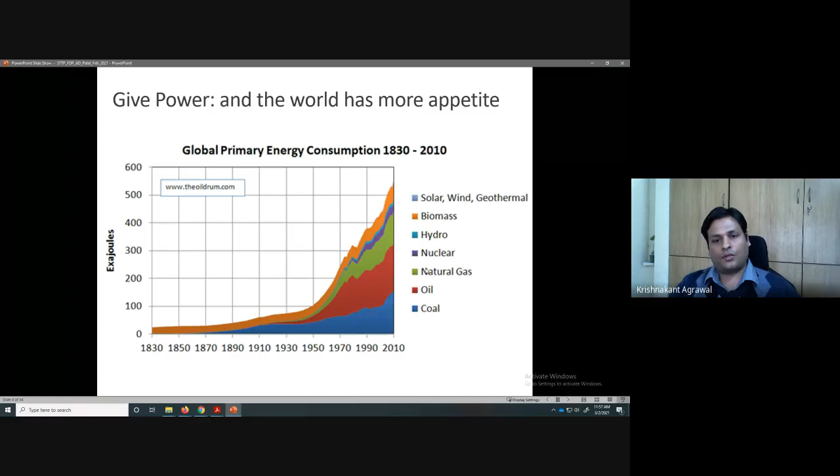But you can't expect to change this scenario overnight. So it will take some decades, or maybe multiple decades, for this scenario to be reversed, that you are having a larger share of renewables and less share of fossil fuel. So this is the world we are living in today, and this is what is happening.

For everything we have discovered nice comfort, and for reducing our effort we are having appliances, and we have some useful appliances, some useless appliances also. But the number of appliances, if you count in your home, will always be growing, it will never be reducing. So you keep buying more things. Dishwasher fortunately is not there too much in India, but it's widespread in Western countries. Air conditioner is a necessity in cities like all the North Indian cities, and so we cannot tell people that you cannot buy these appliances. People will, if they can afford, they will buy.

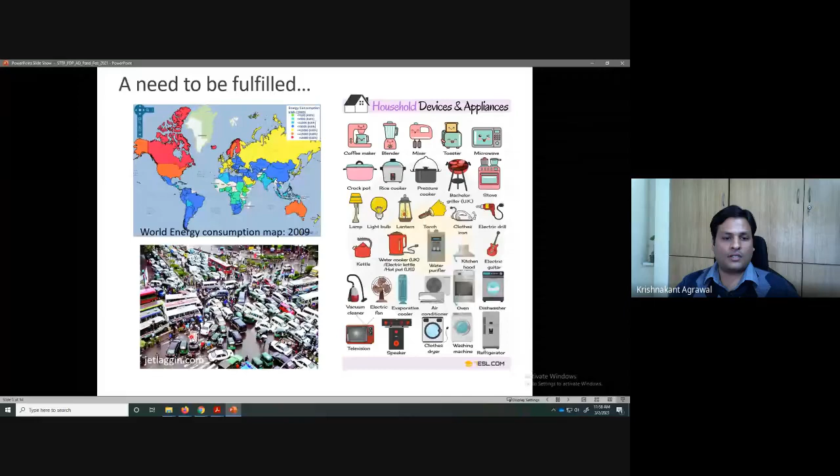And for powering these appliances, you need energy, and you can see the world's energy consumption map. India is reasonably okay. People in the United States are consuming a lot, and China is also consuming a lot. So the need is there, and even your automotives are driven by fossil fuel. Even if you replace them by electric vehicles, to charge the electric vehicles, you need to generate electricity. So to produce electricity, we are having many ways of fulfilling that demand.

We do oil and gas extraction, and petroleum refining. The gas can be burned in a gas turbine, or the oil can be burnt in a gas turbine. This is a typical modern gas turbine combined cycle power plant, which you should be able to see in the outskirts of your cities. Most of the cities in Western countries are powered by gas turbines. In India also, almost 10 to 15% of total power is generated by gas turbines. In fact, in Delhi, the main electricity supply is coming from combined cycle gas turbines.

So here, this small thing over here, this is the gas turbine where the fuel will be burned and power will be produced. You will have an electric generator over here, and then the exhaust gases will go and do heat exchange, and this heat will be used to boil water, and with that water you can make another steam turbine run. So this is why it's called combined cycle. You can get more efficiency.

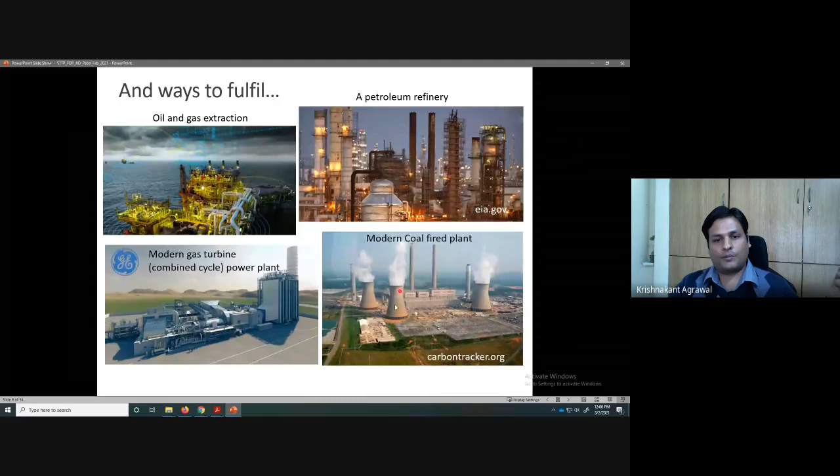Or you can have a traditional coal-fired power plant or nuclear power plant, where you are burning coal, or nuclear power is heating the water, and steam power is used to produce power. So there you will see big chimneys because you want to condense the water. So this is the world we are living with.

So fire originally was used for heating, cooking, protection from wild animals, and it helped to form communities, development of the brain, development of language, Bronze Age, Iron Age, metal extraction; everything was possible because of this. Agriculture, curing disease, and all these things were good. So fire was a nice discovery. I don't know who has the credit for that, who has the patent application for that. But at that time they didn't think about this. So nice discovery of fire, but what about global warming?

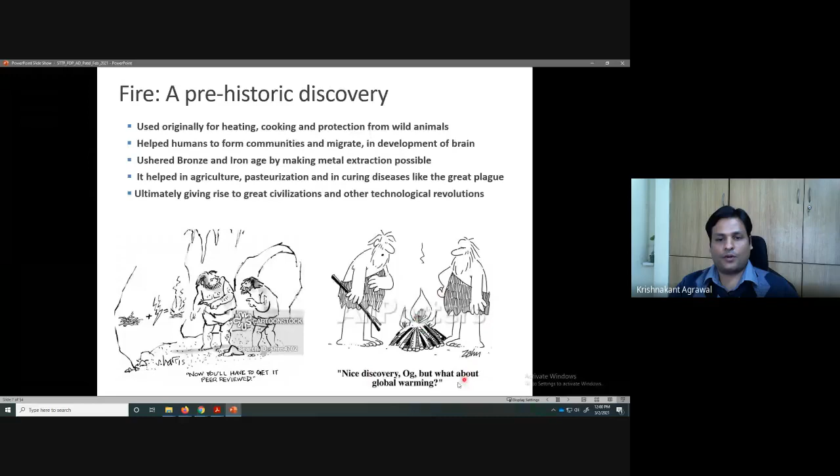So one thing is that we are burning fuel, and why is it bad? It is bad because at present, you see these temperatures are continuously rising, Earth's temperatures are rising, and we are every day seeing the effects of global warming in terms of unpredictability of the weather. It's not like the Earth will get warm uniformly and then the sea levels will rise.

It's not like that. There's a very delicate balance of the environment, of the climate, and global warming disturbs that balance, and then suddenly you start seeing floods in many regions, you start seeing fires in many regions. So last year there was a fire in Australia, and then in the Amazon jungles, and then in California also.

So these fires are getting more and more predominant, and they further increase the global warming. And you see the sea levels are rising. Venice, the city which is famous for all its canals, is situated on the bank of an ocean, and the entire city is submerged in the ocean. So there are no roads in that city. Basically, the waterways are used for all the public transport. So that entire Venice city was flooded by rising sea level.

So all these examples, and then you see so much of floods everywhere. All these weird effects of climate change are happening because of global warming. I showed you first a graph of energy consumption, and then I told you that in the graph of energy consumption, the major contribution is from combustion, burning of fossil fuel, and this is the CO2 emissions. So these two graphs correlate very well. You're burning more fuel, you're getting more CO2 emissions, you're getting more global warming and all these harmful effects.

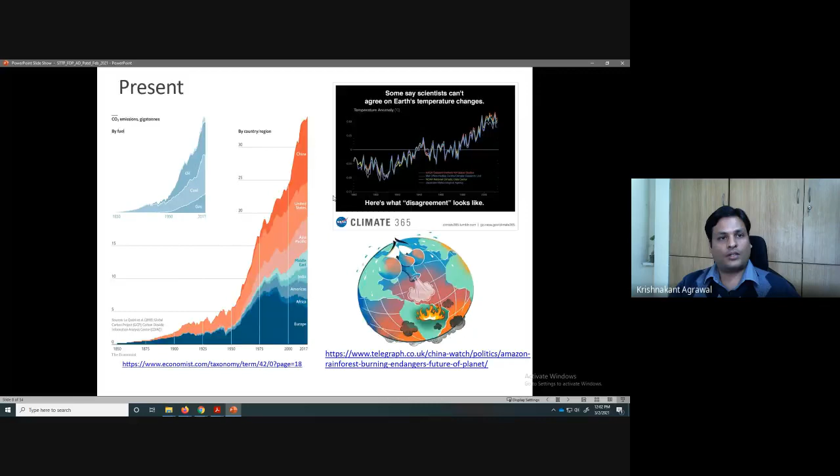So there is a big push everywhere in the world to reduce the fossil fuel dependence. But with a graph looking like this, growing exponentially, an economy always trying to increase, we are trying to get a better economy. It's not like overnight it will be coming down. So what is the future? So we invented fire, but accidentally we burnt our hands also with fire.

And now we are stuck in a world where we cannot deny the comforts of modern living to anyone. We want to have cars, we want to have air travel, we want to have a lot of transport options, we want to have appliances in our home. And we cannot deny this to people, and we have to burn fuel to satisfy that demand. So we have burnt our own hands, but it is going to stay there. So as an engineer, what can we do?

So we are going to have a focus on sustainability. We try to reduce CO2. There are of course some methods like capturing carbon dioxide, carbon sequestration and all, but the fundamental, most basic way to reduce CO2 emission is to make engines more efficient. Typically the IC engines we have on road in automobiles are 15-20% efficient, and gas turbines give around 30% thermal efficiency. Combined cycle gas turbine, where you use the exhaust of a gas turbine to run a steam turbine, can give you around 60% efficiency. So that is the maximum that we have.

So why is efficiency important? Because you are burning fuel, and from that fuel, how much power you are getting. If you need 1 unit of power, how much fuel are you burning? Typically, in the automotive industry, we need to burn nearly 250 grams of fuel to get 1 unit of electricity. 1 unit of electricity is what runs your AC for 1 hour, or your geyser for 1 hour. For that, 250 grams of fuel you have to burn. That is a typical guideline.

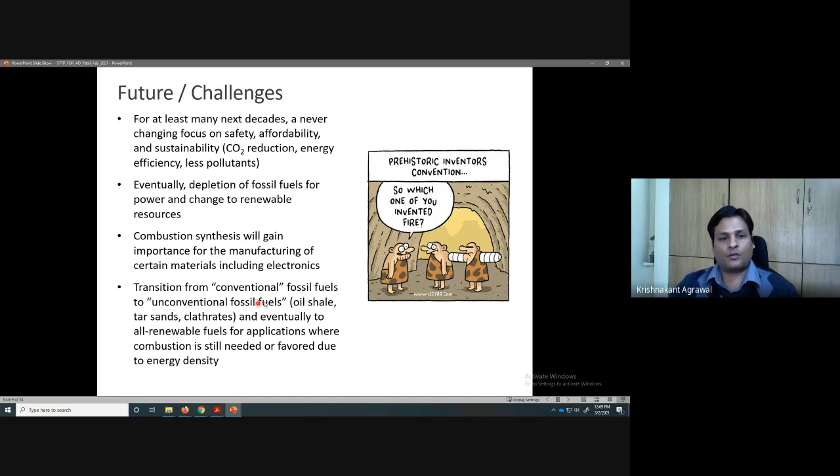So the challenge for engineers is that I have made an engine running on natural gas or petrol, and then you are telling me to burn a new fuel. So then research has to be done. It's not so easy to burn the biofuels and all these unconventional fossil fuels. If the nature of the fuel is different, then the challenges in the combustion will be different.

Inside the flame, there is no oxygen. So the combustion cannot go to CO2 and H2O. After combustion, you are not getting CO2 and H2O. In fact, you are just having hydrocarbons. Those hydrocarbons do very nasty reactions, and they make some particulate matter, polyaromatic hydrocarbon, and soot.

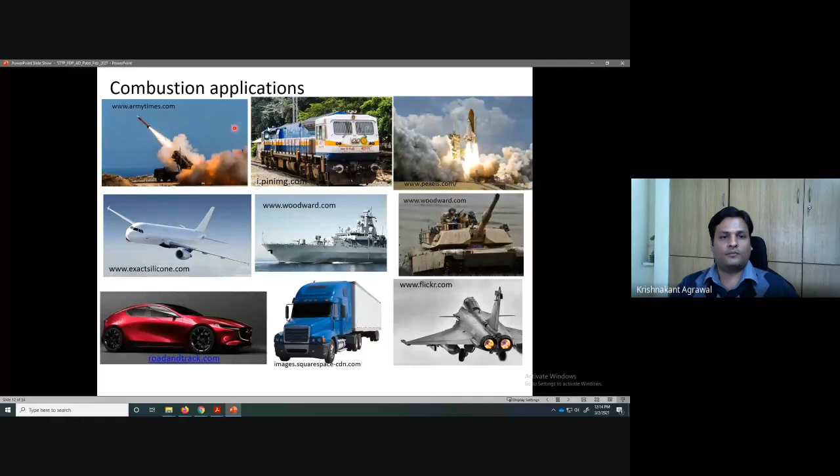So in marine applications, in trucks, locomotives, heavy applications, in remote applications where you don't have the electrical lines, all this is driven by combustion only. So there is some scope in studying combustion. Maybe the cars will get replaced by electric, but still you can apply the knowledge of combustion in many other areas, which will be there in the future also. So that's why I like studying combustion.

And I've just summarized whatever I was discussing in the previous slide. A lot of applications. Out of these many applications, maybe we are seeing some replacement of automotives, but for most of the other things, there is no replacement in sight. Even in process industry, nowadays people are switching to induction furnaces, but they're also having their own limitations on what size you can do.

So yeah, there is a good amount of things. And also we study combustion for this. There is one more application of combustion, which is written over here: a man, after cleaning his car seats with alcohol, sets himself and car on fire while lighting a cigarette. So this is about the hazards of combustion, the fire safety. So if we are having combustion in our homes, we have to also worry about fire safety.

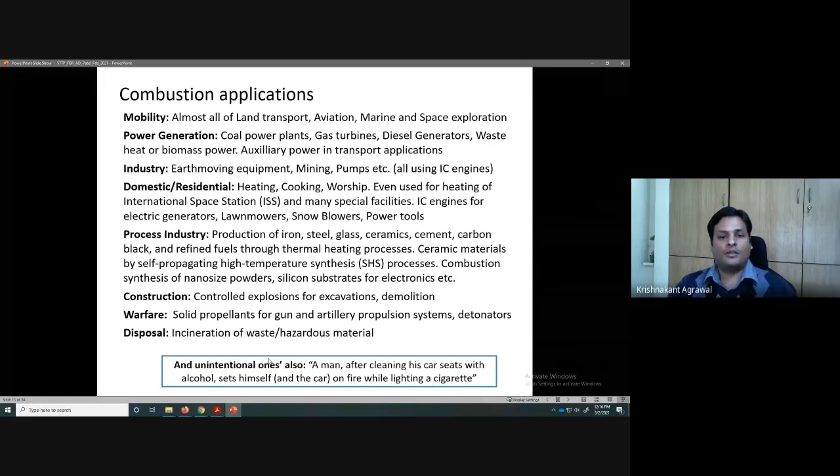If we are having burning combustible materials, the curtains, the furniture, which can burn, and if we have an electric spark somewhere which starts the fire, so we have to also study fire safety. So knowledge of combustion also helps in studying the fire safety. So that's why we study combustion, why the world is so much dependent on fossil fuel. So this is one graph which is showing the energy density.

So any point in the lecture, you can just stop me anywhere if you want me to stop, and you can ask me or you can tell me I can go faster or slower.

So when you want to store power, and mainly in the transport application, it is important for automotive, locomotive, marine ships, aircrafts. So only in the transport application, when you want to have some power source, the fossil fuels are the only choice, because the energy density of the battery is very low. The weight of the battery will be so high that the aircraft or the automotive will be so heavy that it will be difficult to propel it.

So this challenge is being addressed by having better energy density in the battery. But this is the main reason why we have fossil fuel. At least for the transport application, it is going to stay. So now enough of applications. I will talk about the physics, why it is interesting to talk about combustion.

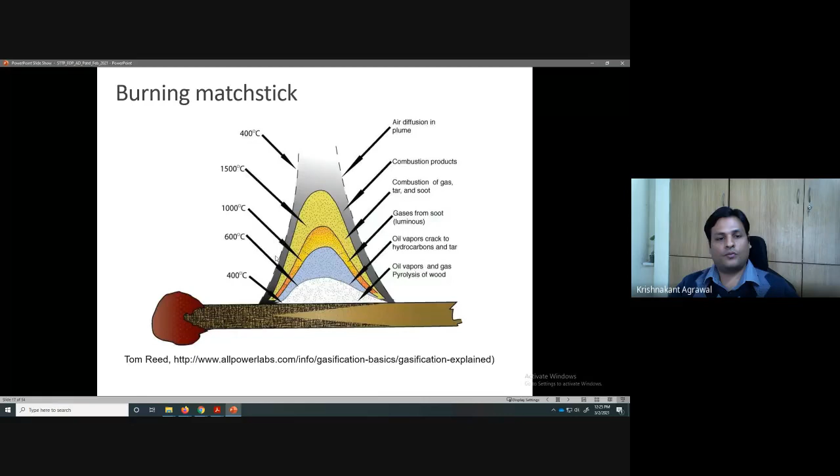To do a simulation of a candle flame in CFD is still a challenging problem. There is no satisfactory simulation in this area. A simple burning matchstick also. But a simple matchstick is not useful. This candle burning is not useful for power devices.

For the real devices, we need to have turbulent combustion. So let us just see the combustion speed that we need in an IC engine. So IC engine, let's say a car is having an RPM of 4000 RPM, and then in 1 minute it will do 4000 revolutions. In 1 second it will do 4000 by 60, and then the piston is going up and down, and the piston is traveling to the topmost point. Normally you give a spark and combustion happens, and then the piston immediately starts to come down.

So maybe you just have this much duration, as the piston is coming towards top center and going from top to bottom. Maybe some 50 crank angles are there for the combustion to happen. So the time available for that 50 crank angles is 2 milliseconds if your engine is running at 4000 RPM. If it is running at very high RPM, you have even less time. So in this time, you have to finish all the combustion. Otherwise, the piston will start moving down, and if the combustion is not complete, the pressure will not be rising, and it will not be able to do enough work on the piston. So you need to have fast combustion.

So if you take a typical bore of a cylinder of an IC engine, a typical bore maybe 5 centimeter, maybe 10 centimeter bore, which is something you can have in hand. So 10 centimeter bore, 2 millisecond means you need a speed of combustion of 23 meter per second. So the combustion should propagate at 23 meter per second. But the normal laminar burning velocities are in the range of 20 to 30 centimeters per second. Okay, so what I need is 23 meter per second.

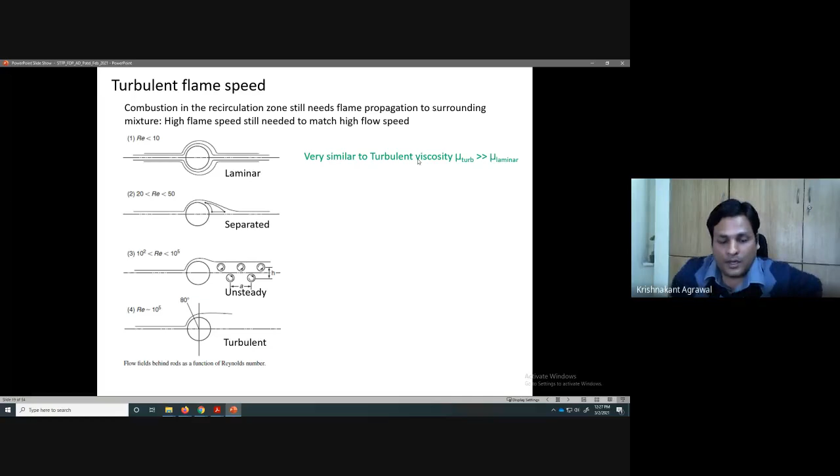So if I'm having a turbulent combustion, you know laminar and turbulent flow. At low Reynolds number, you get a laminar flow. When you start increasing Reynolds number, you go into an unsteady flow, separated flow. Vortices start shedding, and then with a very high Reynolds number, the vortices are very small, and you get widespread turbulence. So turbulence is nothing but this: you are having a straight fluid flow, but inside it you are having these eddies, which are leading to additional mass transfer, momentum transfer, and heat transfer. So they are leading to better transport of things.

So with these eddies, the flow will not be going in a straight direction at high velocity. The flow will get unstable, and it will go in all random directions. So that is what we call turbulence. This turbulence is actually good for combustion, because it will increase the burn rate. How it increases the burn rate we will discuss shortly, but this is the helpful thing. So, reasons for high burn rate in a turbulent flame.

So if you are having a laminar flame, like a sheet, your burning will take place there. Let's say one side you're having unburned mixture, the other side is having burnt mixture. If you're having a laminar sheet, like this red line, then the area available for interaction is less. I told you that these burnt products are giving that high temperature to the unburnt products to ignite them. So if the heat transfer from the burnt side to the unburnt side is fast, then the unburnt products will get ignited fast and the speed of combustion will increase. So the first effect of turbulence is that it increases the flame area.

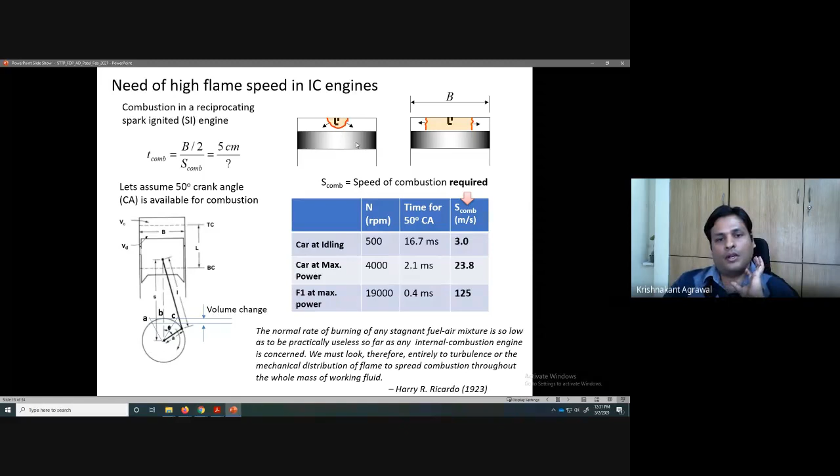So practically, we need turbulent combustion for any practical device to work. Even in a gas turbine, the flow is happening at high velocity, and there is only a small time available in which I have to finish the combustion. And if I'm doing laminar combustion, the speed of combustion will be useless. So I have to always do turbulent combustion. So turbulence is required, and this is what it is doing.

And if you are having very intense turbulence, so there are some numbers to define turbulence. You have some length scales and velocity scales to define the turbulence. So if you are having very intense, very small scale turbulence, the Kolmogorov length scale is very small, and if the eddies are going inside the flame, they can even kill the flame. That is also possible. So this is very interesting physics.

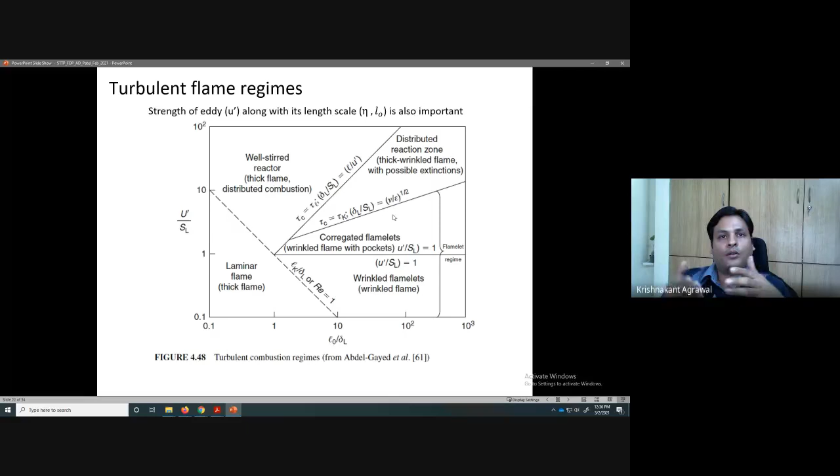But you are having the chemical kinetic equation, and the reaction rate depends on temperature. Exponentially, they depend on temperature. So if you are having turbulent fluctuation at any location, your temperature is not only T, it is T mean plus T dash. So there is some mean temperature and some oscillatory temperature. Then your reaction rate will also be mean reaction rate and oscillatory reaction rate. And since it is non-linear, exponentially dependent on temperature, the reaction rate at mean temperature can be very different from the actual mean reaction rate.

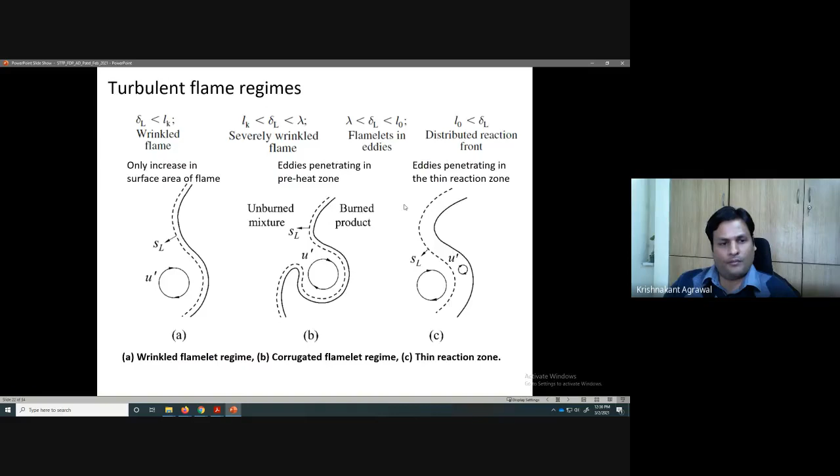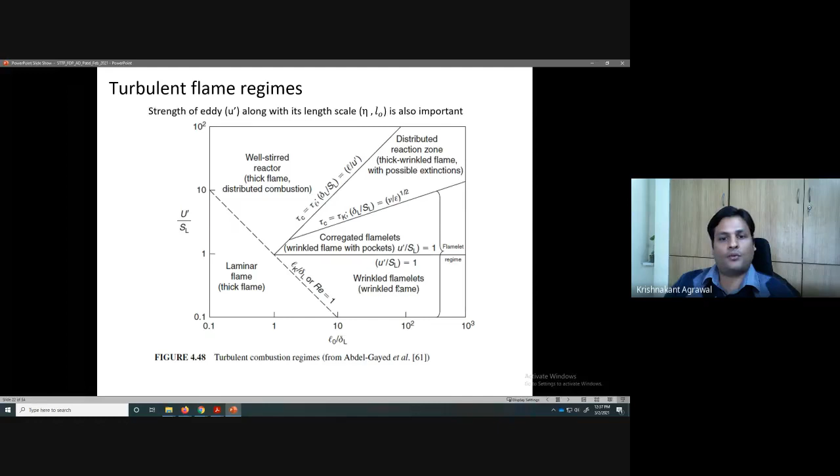So we have to average the turbulence. Average turbulence effects are seen by Reynolds-averaged Navier-Stokes. Similarly, we have to do some turbulent combustion modeling. We will not be able to capture the area increase of the flame, but still we will be able to capture the high flame speed due to turbulence if we are doing turbulent combustion modeling. So for each regime, there are different turbulent combustion models, and we have to choose it appropriately, and we have to see whether it is giving us the correct burning rate.

So one important thing is that combustion is having so many physics, and these physics are all laminar physics, and we have to do some averaging of all these equations if we are having turbulence. We have to have P mean and P dash, rho mean, rho dash, T mean, T dash, U mean, U dash, all the species concentration mean and fluctuating component. And to close the fluctuating part, we have to do some turbulence modeling. So we do RANS turbulence modeling for fluid mechanics, and for chemical kinetics, we are having turbulent combustion models.

So this is a big area and still a research area. People keep developing new models, and in fact, one of my PhD students is also trying to study some turbulent combustion models using OpenFOAM. So this is an interesting research area, and since so many physics are involved, the main issue with combustion CFD is that you cannot trust it.

Maybe your Navier-Stokes equation was good, your RANS averaging was good, you got a very nice code, but you made some mistake in the chemical kinetics code, or you made some assumption which was not okay, or you chose some turbulent combustion model which was not meant for the regime where the device is operating. So you have to know at what velocities and at what Reynolds number my device is operating. For those Reynolds numbers and the kind of mixture that I have, what is the turbulent length scale, what is the chemical length scale, I have to know in which regime I'm operating.

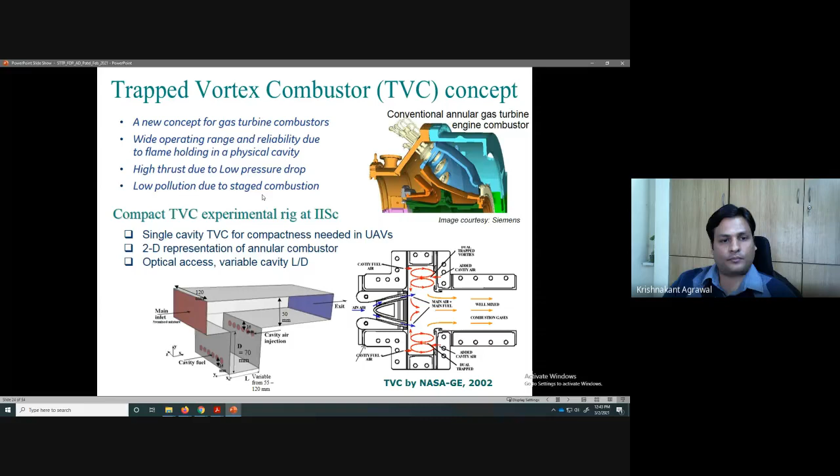So we did this. It took some time, and here the turbulent combustion model was important. The turbulent combustion model we used was the modified eddy dissipation model, which was proposed for IC engine purposes, but we were using it for a steady flame, so we had to vary some settings. After varying some settings in the model assumptions, we were able to get a good match with the experimental results. So this is the first step in any combustion study, a good validation, so that you know whatever code you are using is able to predict the combustion physics.

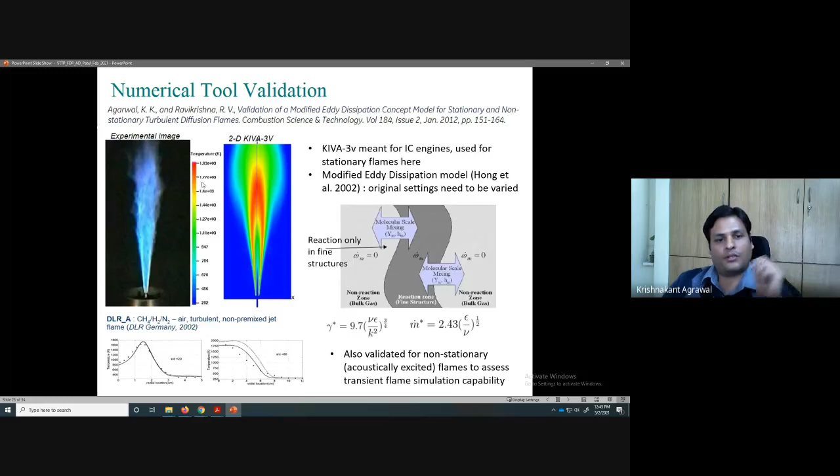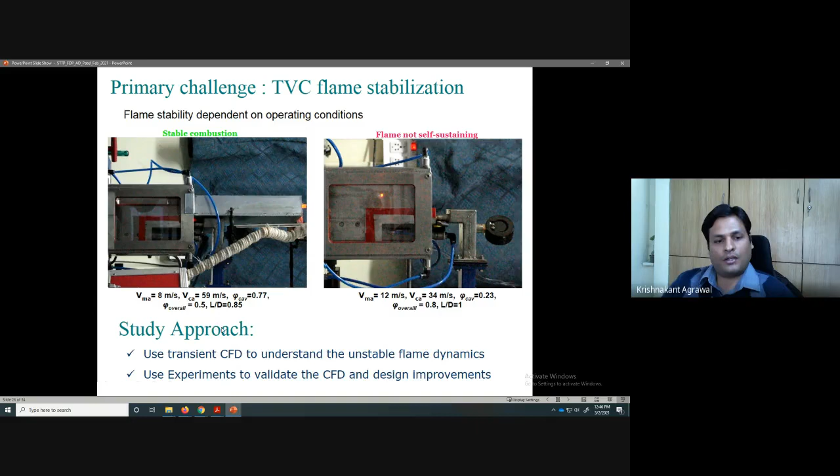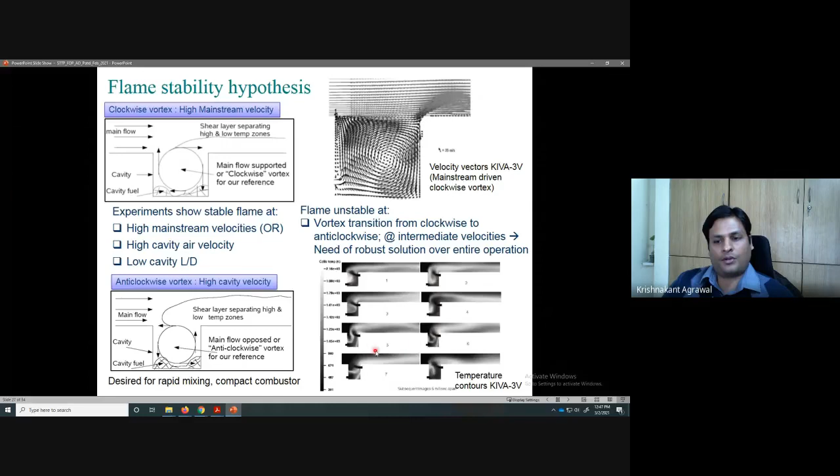In the clockwise case, the problem is that there will be a top layer of main flow where the fuel will just pass through the combustor without getting ignited. This is the problem with the single cavity trapped vortex combustor. To avoid that, we were making an anti-clockwise vortex. But the main flow and the cavity flow were in opposition, and because of that the flow was getting unstable. You can see in the simulation images the flame is not steady; it is oscillating. So we proposed a design solution: we don't use cavity air injection for the anti-clockwise vortex. We use a guide vane.

The guide vane takes some portion of the main air flow and introduces it in such a way that the opposite vortex is created, and that opposite vortex helps in better shear and better heat exchange between the burnt and unburnt products. It will ignite the unburnt products. And there are many advantages. One is that we don't need a control.

If you are doing a separate air injection for opposite vortex, we have to control the flow rate. So we don't do that. We take a portion of main air only. So if the main air flow rate is increasing, this portion of flow which is coming inside will also increase. So automatically the things will adjust itself and we will always get a steady operation. So this thing we learned from CFD, that it will give a very stable operation.

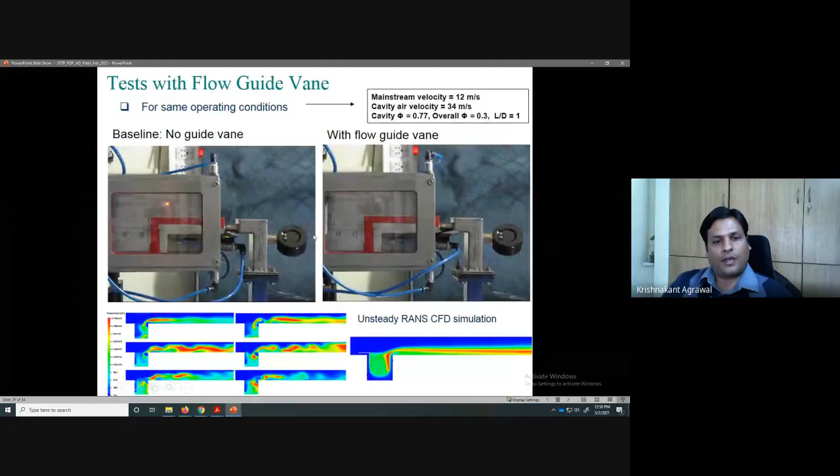So there was a stable flame, but still we see that some of the mainstream flow is going out without burning, and that's where we tried a lot of things with CFD. So I'm not giving you complete details of the CFD, but see, the experiments are just showing you that something is stable, something is not stable. Here it is showing you the mixing is good or not good. But behind the scenes, a lot of CFD was done using that validated numerical model in the first place, which can capture the turbulent flame. Okay, so we had a validated simulation model. So we were making multiple geometries, and we were trying out various design changes.

So one is this design change, where we use some struts to increase the mixing. So struts, like you are having some flow going up, and in between those struts, the flow is coming straight. So you are having a crisscross pattern. So in that crisscross pattern, the mixing is very good. And all of the burnt products will ignite the unburnt mixture, and you get a nice, well spread flame. All the combustion is complete. So this CFD basically helped us to do all these things in the background.

And once we find out, we do a lot of optimization. So this was done after maybe some 30-40 simulations. We found out this design change. Earlier, we tried some straight struts and some other devices to increase the mixing, which were not useful. So we find something useful, then we can go and test in lab. So the main advantage of CFD is that it is cutting down the lab cost, first of all. The second thing is the insights.

So when you're doing CFD, you can plot the vectors, you can plot the temperature profiles, and you can get the insights of what is happening, why the ignition is not happening, why the temperature is not reaching there, in what way the flow is taking a turn, and you can do different design changes as well as detailed post processing. So the main power of CFD is post processing.

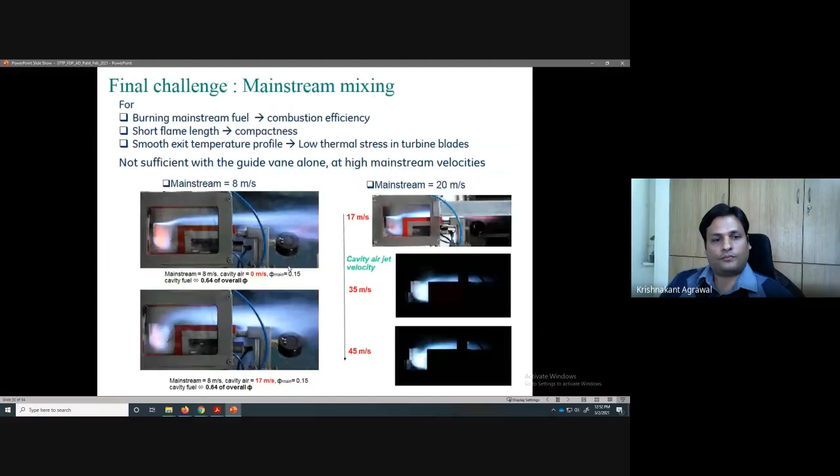And that will give you some insight, very good insights, based on which you can make design changes. So that's how we should be doing CFD. And this was done in my PhD: because of having the simulations and the experimental rigs side by side, hand in hand, we could do some design improvement.

And a similar thing is done in industry also. They make a small rig, they do some experiment, and they match the simulation data with the experiment. Once the simulation data is matching with the experiment, then they do a lot of design optimization. They run a lot of CFD and try to improve the design. Once they are confirmed that the design change is showing some promise, they take it back and test it again in the lab setup.

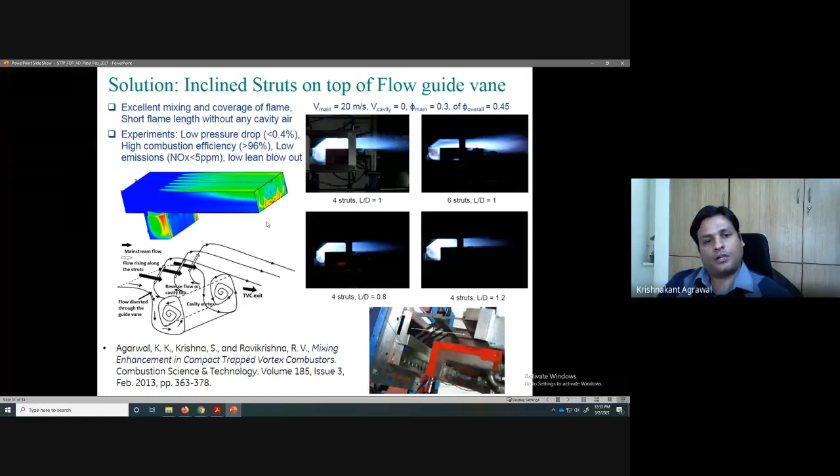So experiments and simulations have to go hand in hand when you're doing combustion CFD, because it's very easy to get wrong. And I talked about these things, some combustion overview and turbulent combustion, why it is important, and about my PhD work. So I'll just talk briefly, maybe another 10-15 minutes, about the industrial side.

In industry, we are using CFD, combustion CFD, for many things. Normally the job there is: when you're burning something inside the engine, how is the heat transfer taking place to the wall? And will my wall fail? So they are not working on topics like flame stabilization, because that problem was addressed long back. They are not working with combustion systems which have unstable flames. The flame is already stable, the combustion speed is high, the burn rate is high. So most of the original issues are already sorted out.

They are mostly worried about the flame temperature profile, how that flame temperature is touching your metal, and what is the temperature on the metal. If you have high temperature on the metal, it can melt. So then they have to take care of some cooling techniques for cooling the metal. For IC engines, you have water circulated around the metal. For gas turbines, they do some air injection through holes to cool the liner, and they put thermal barrier coatings, special coatings to have low temperature on the metal. So the metal should not melt.

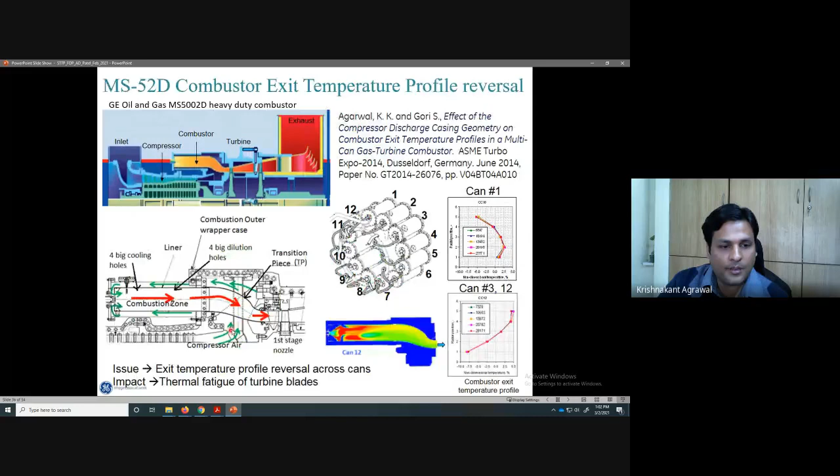And so after a lot of model development, we found the model, and then we were finding that we are capturing the physics. And the reason for that was basically all the cans are similar, but the flow when it is coming from the compressor, in the compressor chamber, they are having some struts. These struts are basically there to support the structure. So these struts are causing some flow disturbance. When the flow is coming from the compressor, it is getting disturbed by the struts.

These are the 2 struts, and there is 1 strut missing after every 2 cans. So for 12 cans, we are not having 12 struts. For 12 cans, we are only having 8 struts. For cost cutting, maybe, or some other simplification purpose, 1 strut was removed. So if you see 3 cans, between these 2 cans, there is a strut. Between these 2 cans, there is a strut. But between this can and the next can, there is no strut.

This is a periodic model. So after this, there will be the next can. So there is no strut. So that is leading to some asymmetry in the problem. And because of this strut, locally the flow was getting accelerated. This is like the Venturi effect. And that flow is disturbed. So in 1 can, although the flow is coming straight, it was coming from right to left. In the other can, it was coming from left to right. So it was taking a turn like this.

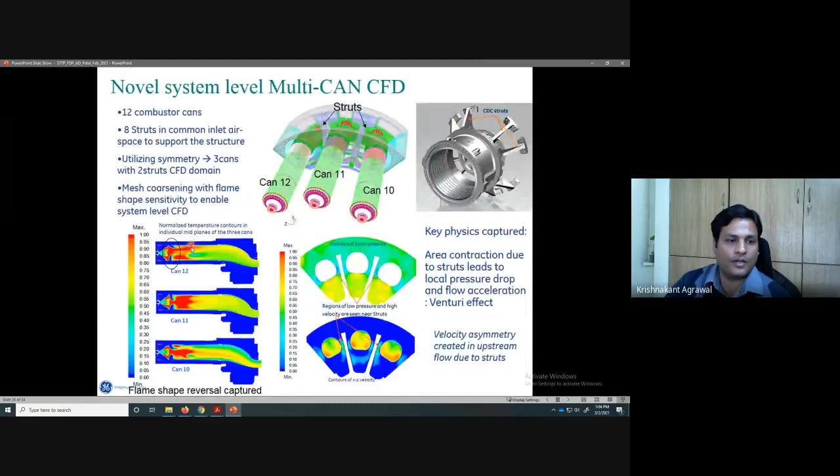And because of this turn, basically the flow has to enter into these combustion holes. So in some of the cans, the flow was not coming inside from the top hole. In this can, it was not coming inside from the bottom hole. The flow was weak. And because of that, the flame in this can, because the top hole is not having enough flow, the flame was pushed towards the top, and here the flame was pushed towards the bottom. So this was a very interesting thing, and we published this in an ASME conference, and this was told by CFD only. Okay, so this is one example of using CFD for combustion.

But normally what we do nowadays is that we want to capture all the details of combustion, the turbulent combustion, for capturing the actual physics, the burn rate, how fast the combustion is happening. Also for capturing the pollutant emissions, that will depend on the turbulent flow. If there is some turbulence causing quenching of reaction, you will get a lot of CO. If there is some turbulence causing quenching of reaction, you might not get NOx. So high-fidelity combustion is nowadays the research trend.

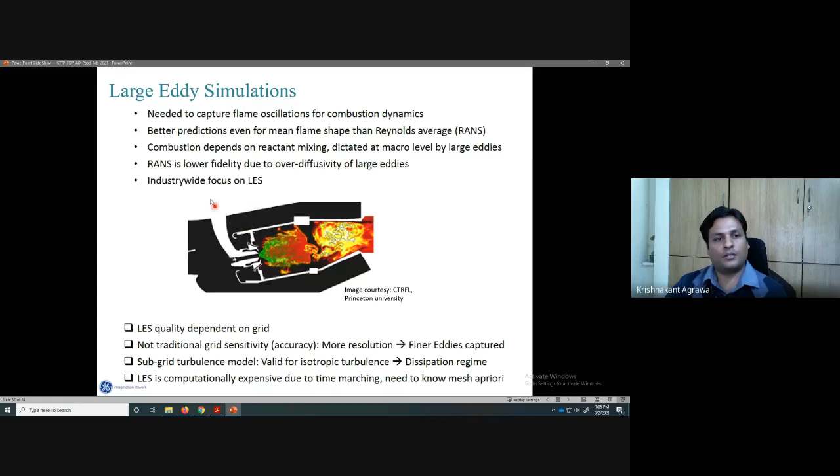So everybody is coming up with supercomputers, 1000 CPUs, 1000 cores, Cray computers, and they are doing these simulations. And they're trying to predict the emissions more accurately. Also the flame oscillations, how the flame oscillates, and how it can lead to pressure oscillations. And the pressure oscillation can lead to vibration of the structure, and the structure can fail. So people are doing these simulations nowadays. And large eddy simulations are a trend in the industry now.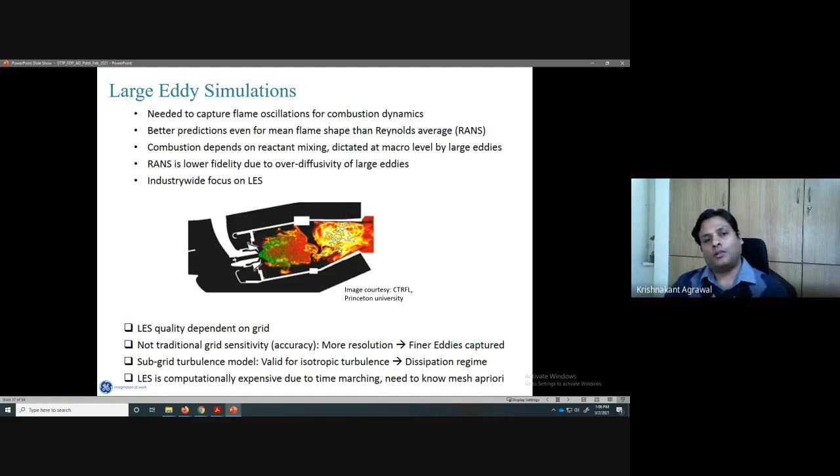And LES quality is dependent on the grid. The finer grid you have, the better you can resolve the details of the turbulence. Finer eddies can be captured. But where to put the grid size? If you're making a very fine grid, you're having too many cells, then your computational model will be heavy, and you will need more cores to do the simulation in a reasonable time. So that's a challenge. So we need to achieve a balance, how much you want to resolve. If you don't resolve enough, then you don't get enough accuracy. Your solution might be like a RANS solution only. So how to determine the grid size, and on that we published a paper.

And this is with acknowledgement to Professor Shantanu Dey. Sorry, it's Professor Ashoke De in IIT Kanpur. He guided us for this work.

So basically, there is a turbulent kinetic energy spectrum, and in this one, you see what is the turbulent length scale. What is the length scale of the turbulence? You can have large scale eddies, you can have small scale eddies, and where do you want to put your grid size? So there are some turbulence equations which need to be studied. But basically, by knowing the flow velocity, the flow density, the overall length scale of the problem and the viscosity, you can plot this diagram.

This utility is there. Even my PhD student is also working on this. He is also having this utility. It was developed by Professor Shantanu Dey from some textbook equation. Sorry, Professor Ashoke De from IIT Kanpur. So you can plot this spectrum.

You can find what is the length at which the turbulence is ending and starting to dissipate. And this is the length where I can put my grid size for a very accurate capturing. If you want a little bit less accuracy, I can put my grid size here, and then I'll be capturing only half of the turbulence, and half of the turbulence is not captured. So I will know what length scale is good for capturing turbulence.

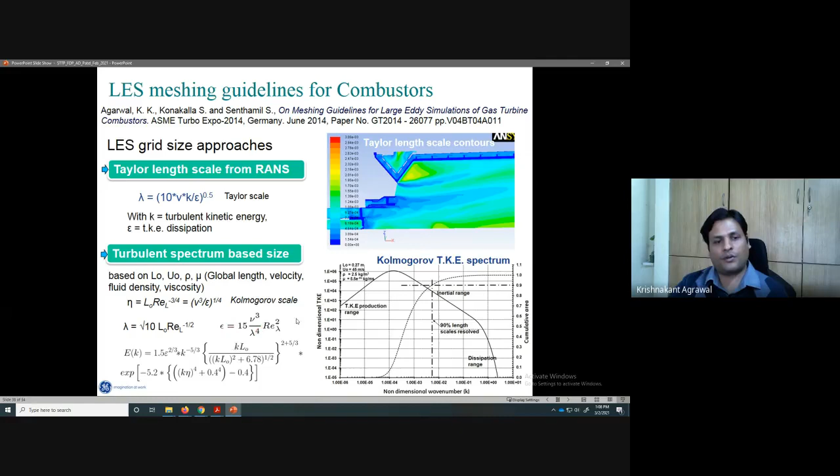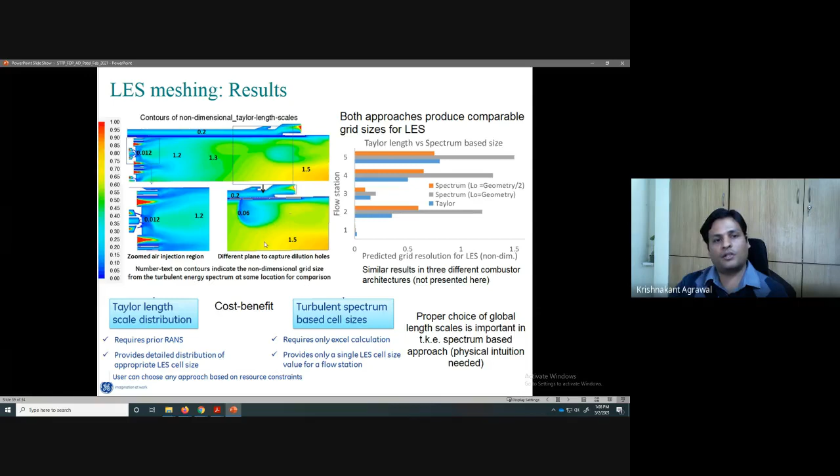So we found out the Taylor length scale, and then we found the length scale from these formulas, and then we tried to match these two, and we found that there is a good agreement. So LES grid resolution, non-dimensionalized, not in mm. So LES grid resolution predicted by the Taylor length scale and by this formula are matching with each other. So we can use the formula instead of doing RANS simulation and find out the length scale. So this was also published.

And right now, my PhD student is doing some work on turbulent combustion in IIT Delhi, and some publication is yet to come out. He is still trying to do the validation of the simulation.

One master's student last year was studying swirl combustors and how the fuel air mixing is happening. So this is also a very interesting study which was published in a conference last year, where you have to choose the correct turbulence model, and you have to do a good refinement near the fuel air to get a good agreement with the experiment. So this was basically about validation, and yeah, that's it.

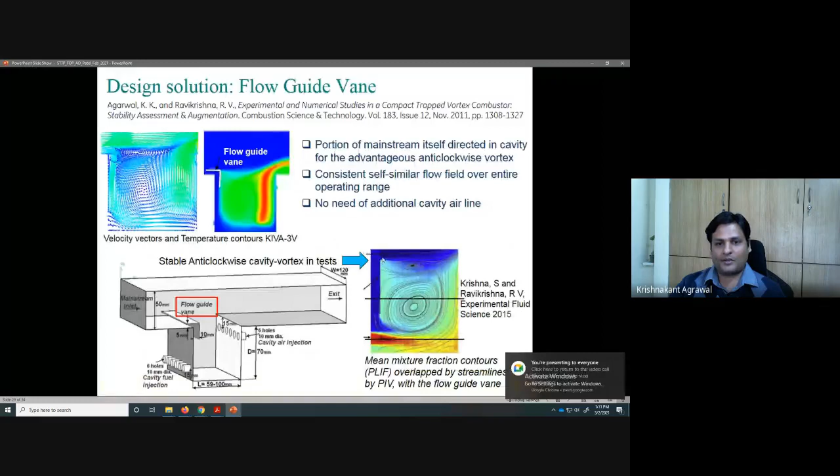Sir, regarding that candle flame, you said that this is very challenging, that many multi-physics are involved in that one. Why is that simulation not possible, sir? Yeah, so that's quite interesting. Actually, the combustion part is easy there, but the hard part is to capture the radiation. So the shape of the flame will determine how much radiation heat transfer is happening from the flame to the pool.

And if you're predicting some radiation, with this radiation some melting rate is there, and after melting there is this physics, this wick, in this wick by capillary action, the liquid is pulled.

So that should be accurate. That itself is a difficult thing: to predict the flow rate in the capillary. Even if you predict that, let's say some mistake is there and you're predicting slightly over flow rate, the flow rate itself is not fixed. If your flow rate is high, then your flame shape will be different. If your flame shape is different, then the radiation from the flame will be different, and the melting rate will be different. So it's a balance between melting rate, the flow rate from this wick, and the flame shape.

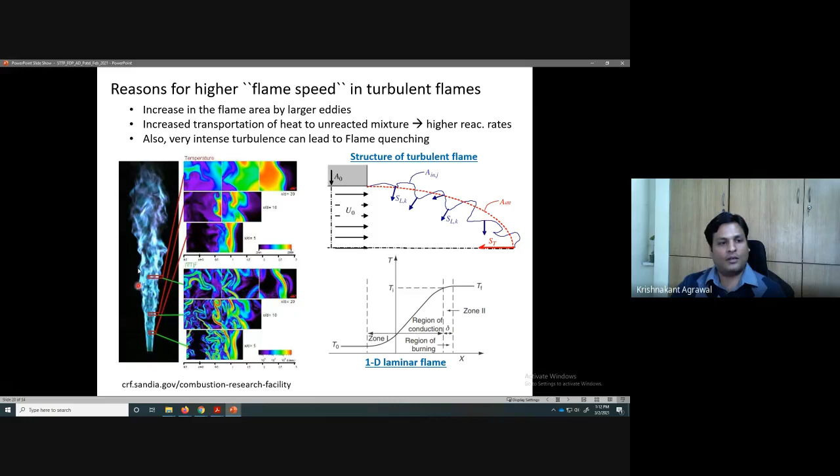So if you are not capturing any one thing accurately... Capturing the flame shape is a little bit hard. Capturing the flow in the wick is hard, and the flame shape can affect the melting rate. So basically, combustion in industrial application is easy, because in industrial application you at least know your flow rate, which you can put in CFD. You know that air is coming at this velocity or this mass flow rate, fuel is coming at this mass flow rate, and you can put it in CFD as a boundary condition and get some flame. But here in this application, your flow rate itself is dependent on the outcome.

So either you measure the flow rate somehow, and then you remove the candle part, you remove the wick part, and you have just measured some wax consumption rate, how fast the candle is melting in reality, that you have plugged in, and then you are not doing the full simulation. So I was talking about the combined coupled simulation, where the flow rate itself is determined by the CFD. So that is hard. And the second hard part is this natural convection.

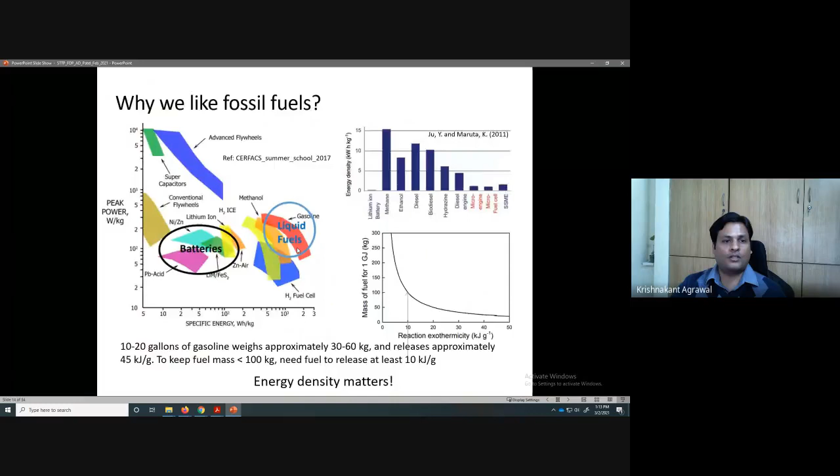With many students in my PhD experience, and now I'm seeing people who are trying to model a simple LPG stove flame, they are not able to match the results, because for natural convection, the flow rising because of heating, CFD codes are not good; it is very sensitive to the boundary condition. Any CFD domain you have to cut somewhere. You're not having an infinite environment in which you can do the CFD. So you're having a flame and an environment, you have to cut somewhere, and you have to cut at the bottom also.

So at the bottom, when you're cutting the domain, what boundary condition are you giving: flow inlet, velocity inlet, pressure inlet, ambient pressure? At the side also, what boundary condition are you giving? Maybe you can make the domain very big, and the effect of boundary condition can be minimized. But still, it's very challenging. People have tried in labs, I've seen many people. But just to get an LPG gas stove flame, natural convection with correct boundary conditions on the bottom side and the left side is tough. Fuel and air injection is easy. But in an ambient environment, to capture the natural flow is tough.

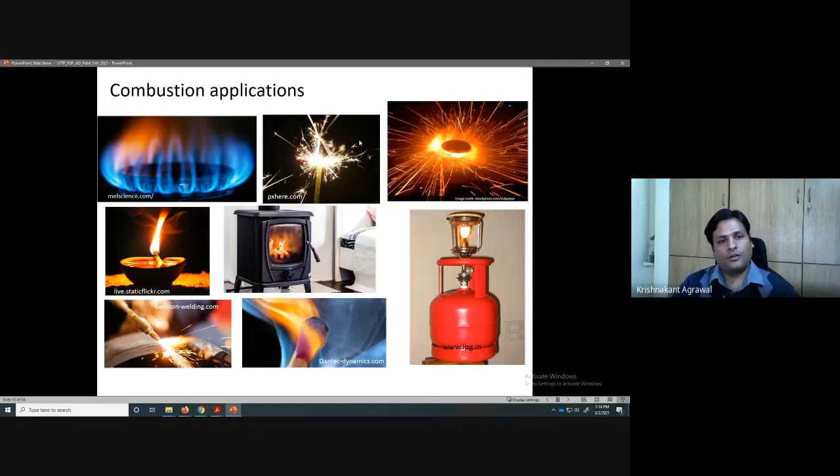So that way, gas turbines are better, because they have a closed geometry. You don't have to worry about the boundary conditions on left and right, on top and bottom. You only give air inlet, fuel inlet, and there is a pressure outlet or velocity outlet or outflow boundary condition. So industrial devices are easier to simulate. And all this natural flame, natural convection, you try it yourself, you will find it harder.

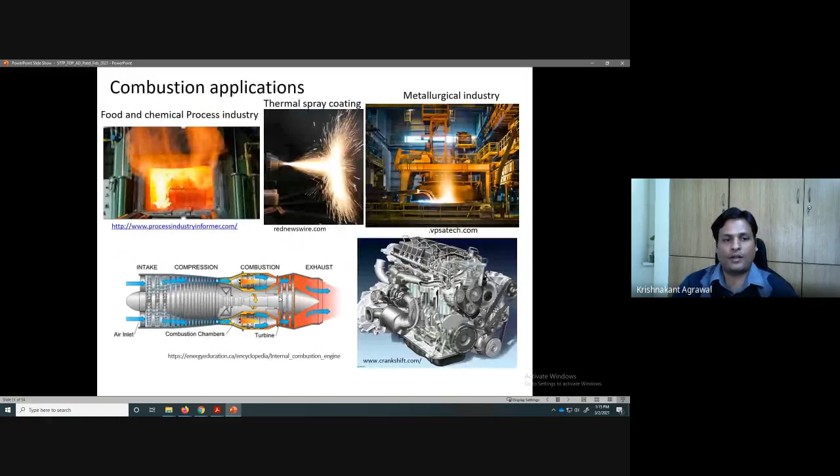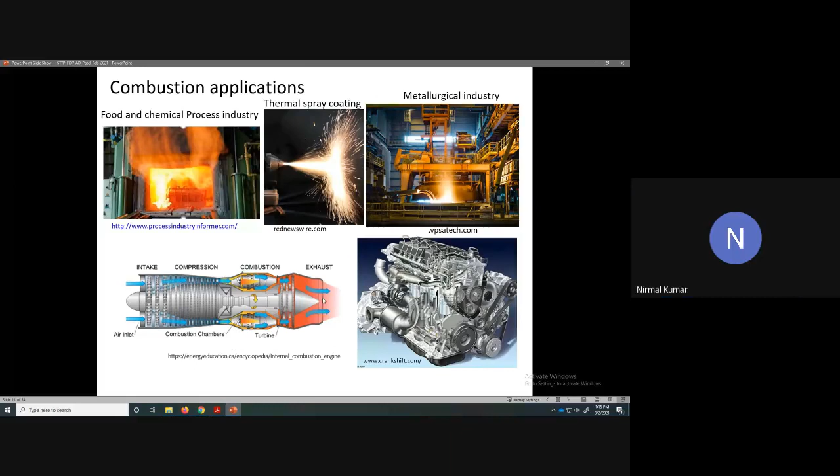Sir, I'm asking whether any research is going on regarding this candle flame. I'm not aware of that, really, because in CFD I've not seen any.

The basic candle flame, it is very interesting, was discussed by, what is the scientist's name, a very famous scientist in electricity, Michael Faraday. Michael Faraday first studied the candle flame. He was an inventor in electricity, but he was also the first person who looked at combustion systematically. And he showed the fluid mechanics, heat and mass transfer, all these things very beautifully in a series of lectures. So you can Google Michael Faraday's lectures on the candle flame. There are 6 lectures. YouTube videos are there, and he explains this physics very nicely.

And that I know from textbooks, but from the research perspective, because I've been working in industrial combustion, I didn't get a chance to. The only interest in a candle flame could be for academic purposes. There's not much industrial application of this device. So if somebody is doing research, I'll be very happy to know. Please mail me. I'll also include that reference here. But I'm not aware of any research going on.

Some chemistry people do this. Chemistry people, they have a flame and then they put some chemicals in the flame and then they see the radiation, the different colors of the chemicals coming out from the flame. But the basic fluid mechanics and how the flame is formed, the combustion physics, I don't think anyone is doing, because it's not so interesting.

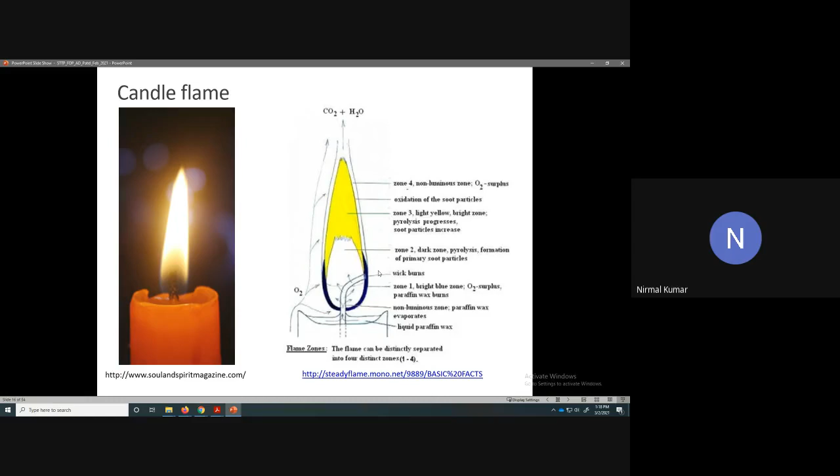There are some basic flames defined in combustion literature. There is one opposed jet diffusion flame, where you put the fuel from one side, air from the other side, and the velocities are fixed. You know the velocities. Candle flame, you don't know the velocity. Both of them come in contact with each other, they burn, and then they leave from top and bottom. That is the opposed jet diffusion flame. That is available in Cantera. You can try that. It will give you the profiles along the fuel and air center line.

You have a freely propagating flat premixed flame. In a flat premixed flame, you will have a fuel-air mixture coming up, the flat flame will be formed, and the reactants will go to the flame zone, be converted to products and come out from the other side. So it's a one-dimensional flame. One-dimensional opposed flame, one-dimensional flat flame. Here you are having two dimensions. That is also one thing which will make it slightly tough. Okay, so thank you, sir.

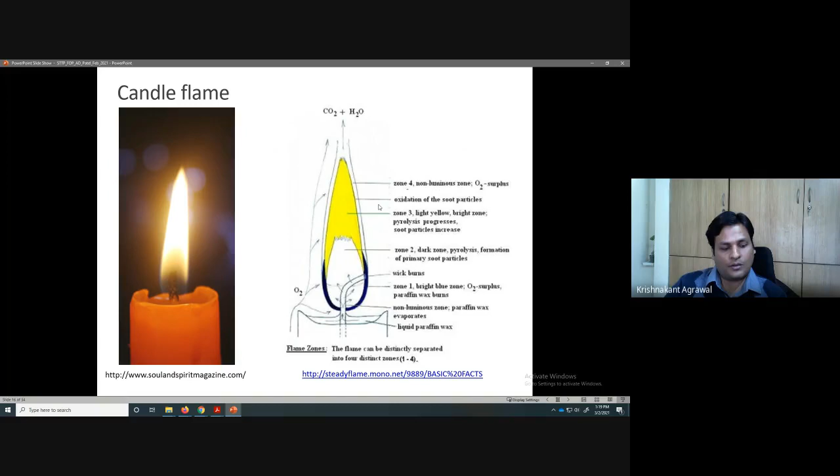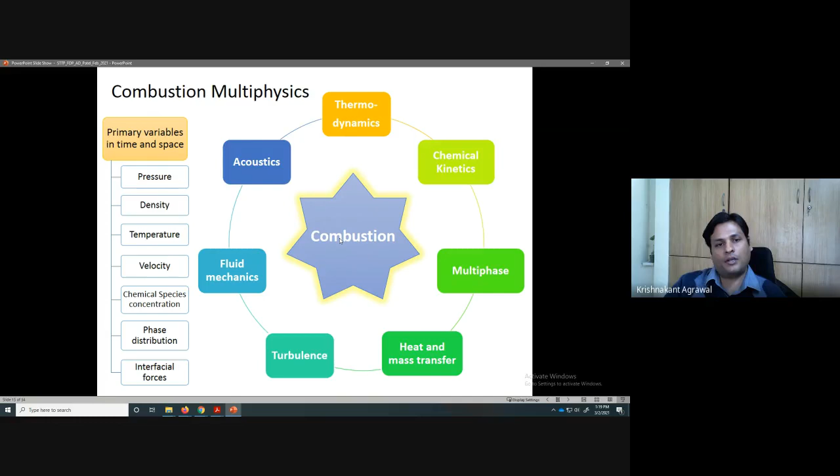In Cantera, some basic flames are defined there. You can do those things. It's a good exercise. Freely available software, tutorials are also there. People can try it out. It is just addressing one part of the problem. Cantera is only addressing chemical kinetics, thermodynamics, a little bit of fluid mechanics, laminar flame, and heat transfer. And only in 1D, one dimension. That is the constraint. When you want to go to two or three dimensions, you need to do CFD, where you solve the fluid mechanics equations in three dimensions. Okay, thank you, sir.

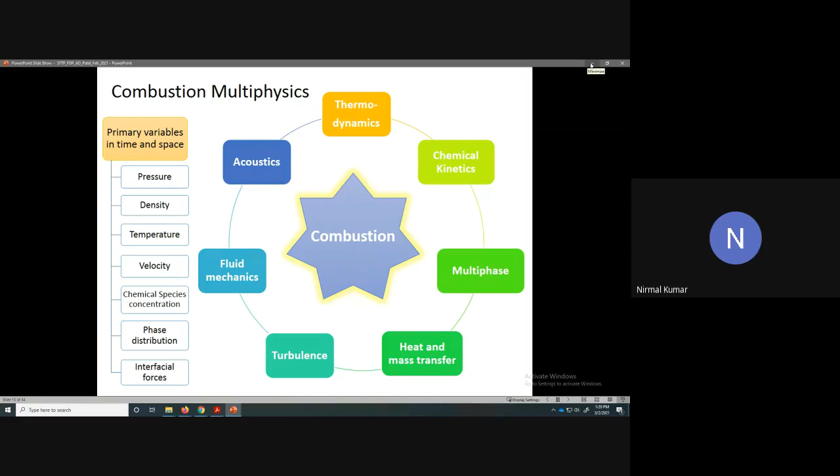Okay, then thank you, Agrawal sir, for delivering such a wonderful talk. You have covered your presentation very nicely, especially sharing your experience in industry on simulations of combustion and turbulence phenomena. I hope that would be very useful to the participants in understanding the role of a CFD engineer in industry. You also shared your PhD work, which was really good. You covered it from fundamentals, from combustion applications to combustion multiphysics and then the simulation part. It was a really good and engaging presentation.